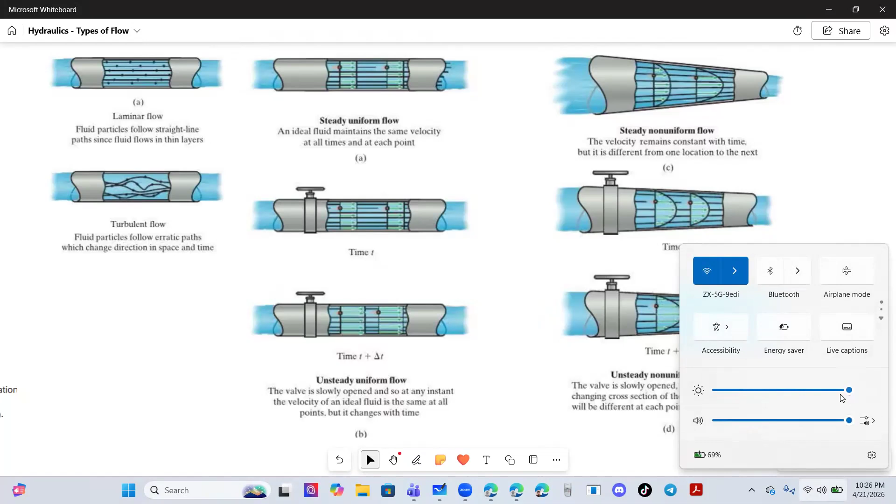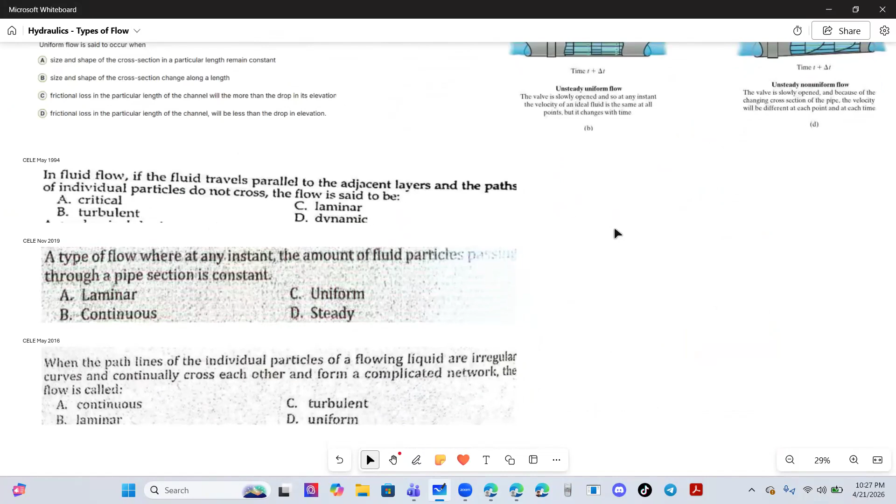Okay, so discuss natin tong fundamentals of fluid flow sa hydraulics, specifically yung types of flow. Ilang beses na yan lumabas sa boards, eto may compilation na ako, puro terminologies nga lang. Labasin yan eh, so practicein natin yan. Ito from IndiaBix, and may lumabas daw ng March 2026. Discuss natin, recent lang, parang ganyan yung tanungan.

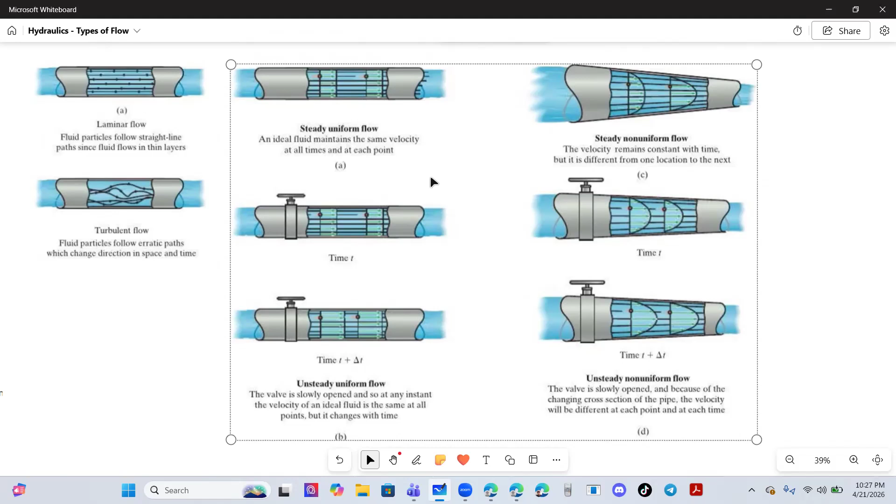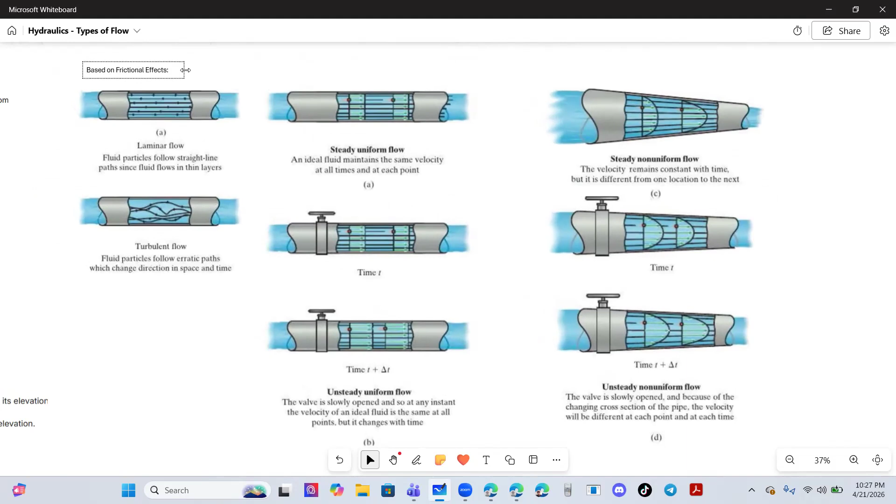Okay, so dito sa types of flow, meron kasi tayong maraming types or classification. Itong laminar and turbulent, yan yung based on frictional effects, kasi nga yan yung ginagamitan natin ng Reynolds number. Based on frictional effects yan siya, yang laminar and turbulent. Then meron din tayong tinatawag na based on space and time. Space as in yung position, position na lang kaya, space kasi sa book eh. Position and time. Ba mas malaki, so yan yung apat na yan.

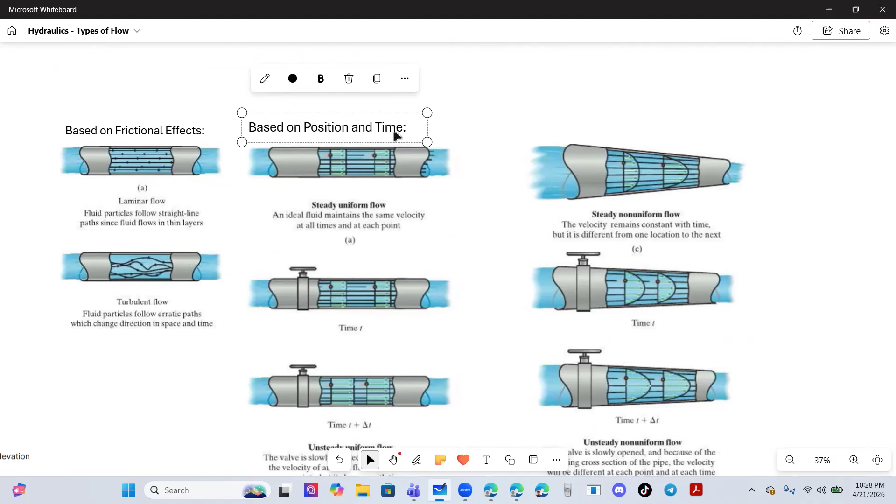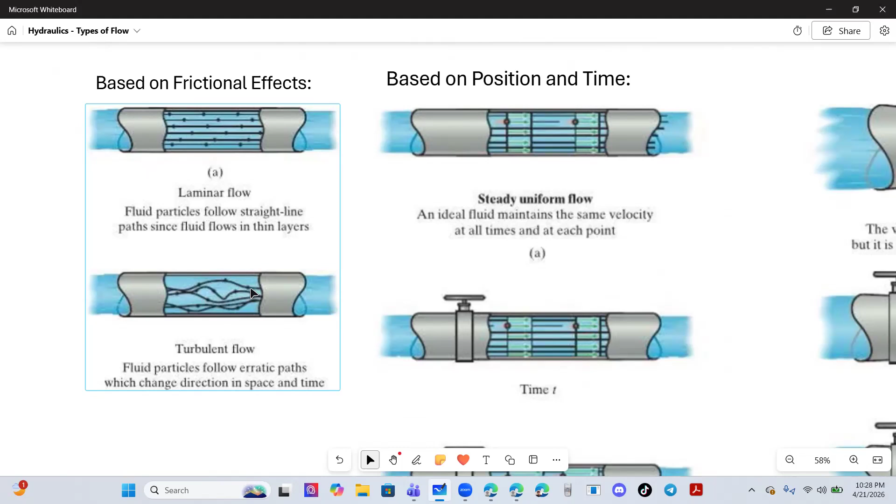So sa based on frictional effects, we have laminar and turbulent. Ang classification lang nito, kapag laminar, ayun yung paths niyan, yung fluid particles, yung path nun, is straight line and parallel, okay, so di yan magko-cross sa isa't isa. Unlike sa turbulent na yung erratic, nagko-cross cross with each other. So yun lang yan. Then meron pa yung values na Reynolds number, iwalay na lang natin na video yun. So dito in general muna tayo, so ganyan lang sa frictional effect, it's based on frictional effects.

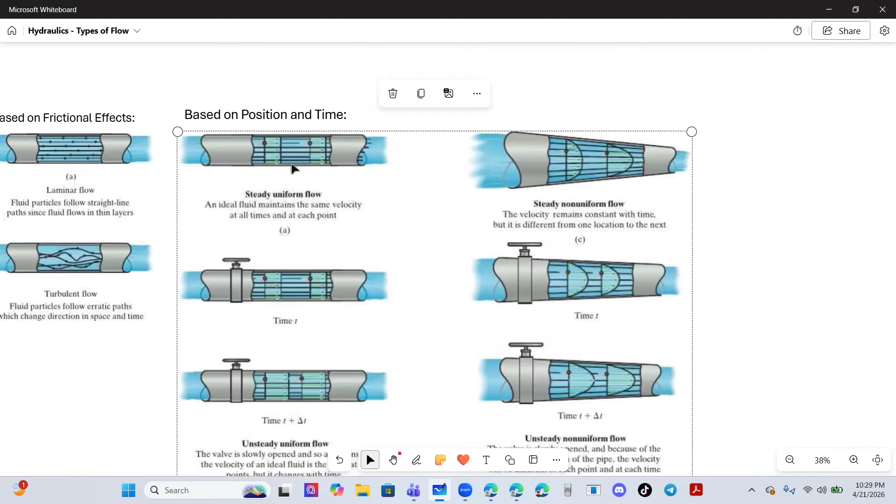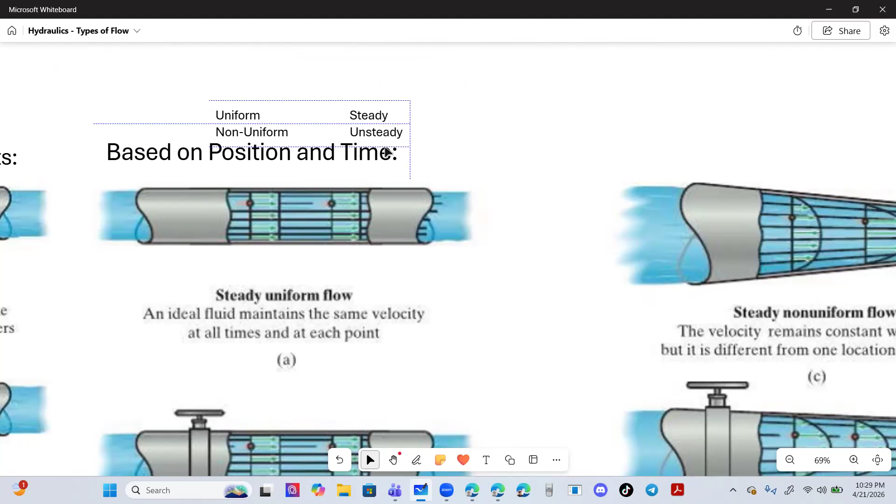So based on position and time, we have steady and unsteady, tapos uniform and non-uniform. Actually pag position, dito ko na lang, pag position yan yung uniform tsaka non-uniform. Okay, pag position, uniform or non-uniform yan. Pag position, either uniform or non-uniform yan, kasi yan yung nakabase sa cross-sectional area ng pipe. And kapag time, yan yung steady and unsteady. Yun lang, then pwede yan silang mag-cross, kaya apat yan, 2 times 2, 4. Pwedeng uniform unsteady, uniform steady, non-uniform steady, non-uniform. Oh baliktad pala ako, steady pala yung una: steady uniform, steady non-uniform, unsteady uniform, unsteady non-uniform. O ganun, so again kapag steady.

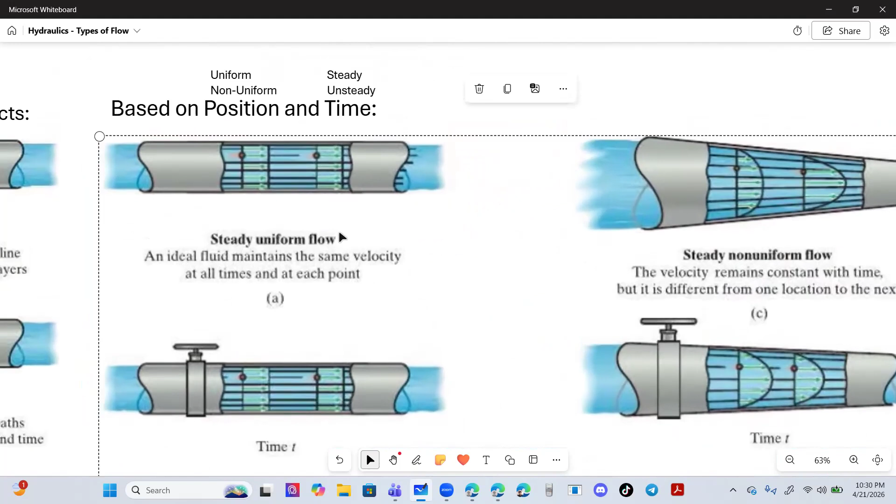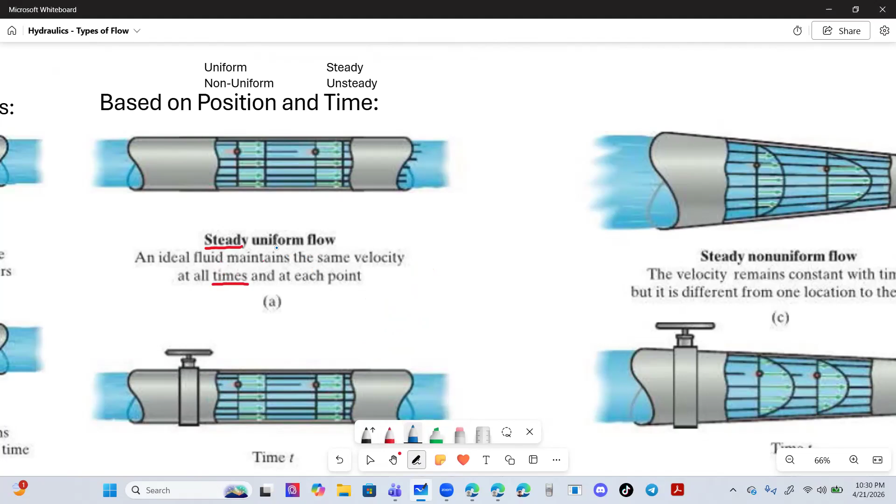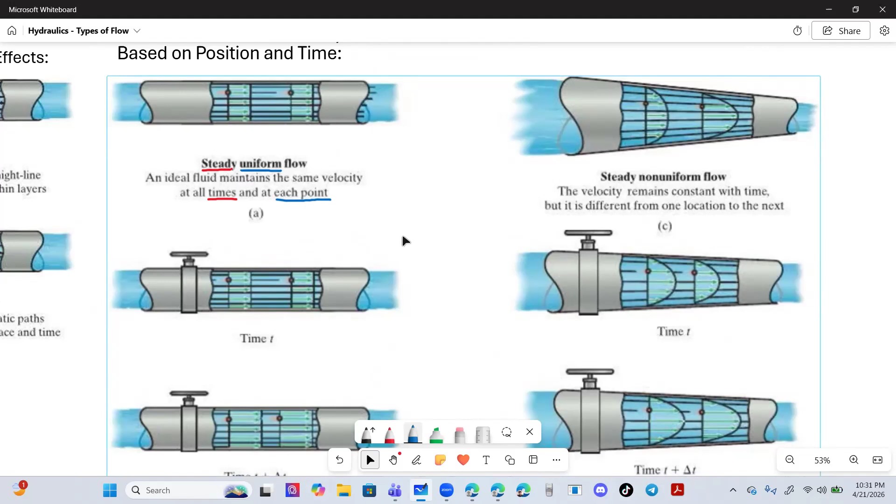Ito yung tinutukoy niyan. Kapag steady, an ideal fluid maintains same velocity at all times, so ayan, steady for time. And then ang uniform naman, anong shape? Ano nung kanina, tatlo. O kapag uniform naman, yan yung nagbabari sa each point, so cross-section. Kaya masasabi mo kapag similar, uniform yung cross-section, uniform flow yun. Ganun lang, diba, so ayan. Kaya ito, steady uniform, so hindi nagbabari with respect to time and hindi rin nagbabari with respect to distance, position. Kasi all throughout ng pipe is same cross-section lang, prismatic kumbaga. Di ba, ito pag steady ng uniform, ito yung sa steady, velocity remains constant with time.

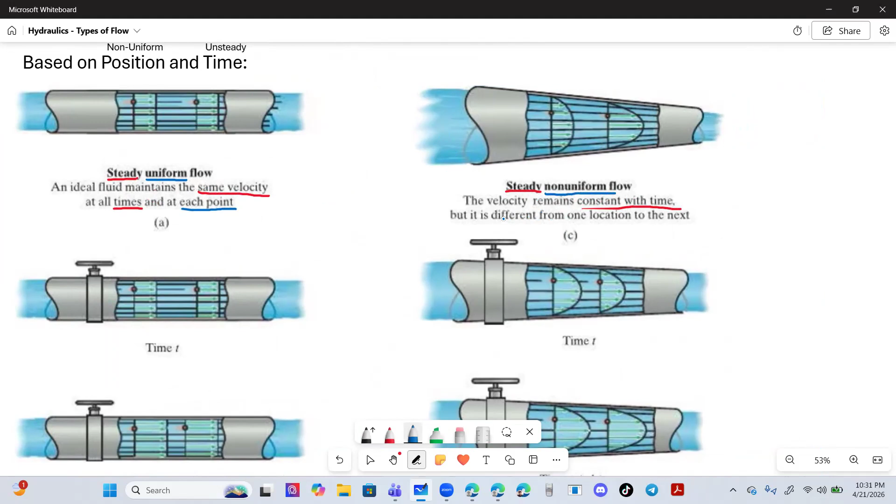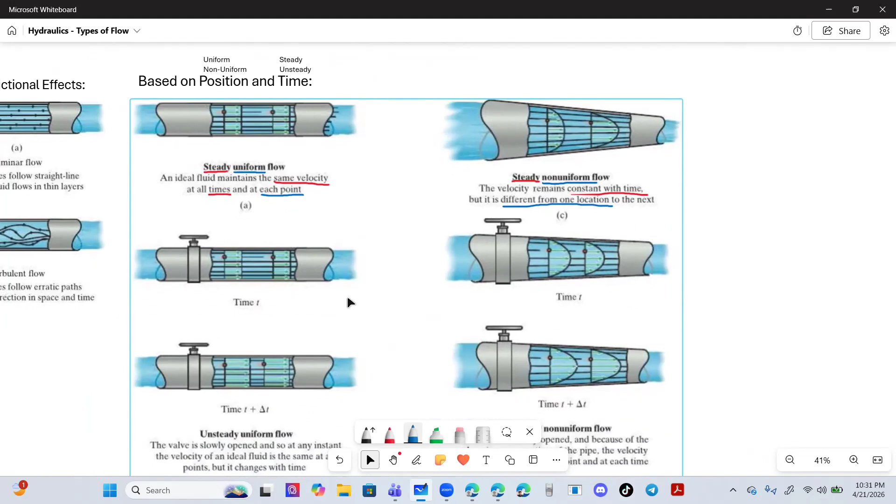Yan, constant with time, ito same velocity at all times kanina. And then kapag non-uniform naman, ayun, different from one location to the next. Kasi nga ayun no, tapering siya di ba, so dito mas malaki, dito mas maliit. Non-uniform yan, pero steady, kasi with respect to time, same velocity lang. And kahit anong oras, same lang yung velocity sa bawat cross-section. Ay, sa bawat oras rather, sa bawat cross-section, yun na yung magiging, nagba-vary na siya.

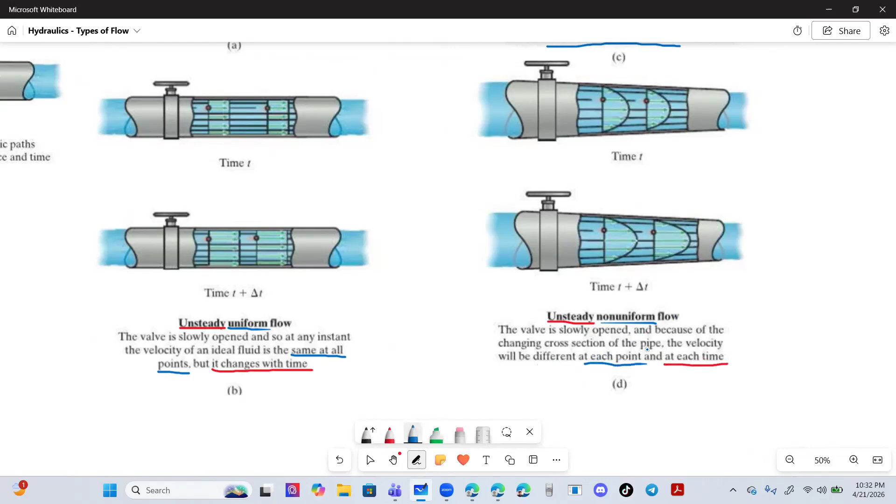Kaya non-uniform. Okay, so dito tayo sa unsteady uniform. So pag unsteady, again, it does change with respect to time. So the valve is slowly opened and so at any instant, it changes with time. Pero para sa uniform, at any instant, velocity is the same at all points, kahit ano ang location niyan kasi uniform nga siya, same cross-section lang all throughout. Pero dito sa isa, ano naman ma-undo? Dito sa isa, unsteady with respect to time, yan, different at each point, different at each time, and then non-uniform din siya kasi different din siya at each point. So ganun lang, and pag pinagsama-sama yan, ayun na: pwede steady uniform, steady non-uniform, unsteady uniform, unsteady non-uniform.

Pero dito sa isa, sagutan natin tong una, March 2026, discuss na natin. So if the velocity of the particle varies from point to point, vary from point to point, so that is, yung velocity nagbabago di ba, non-uniform yan. O yan na ba yung sagot natin?

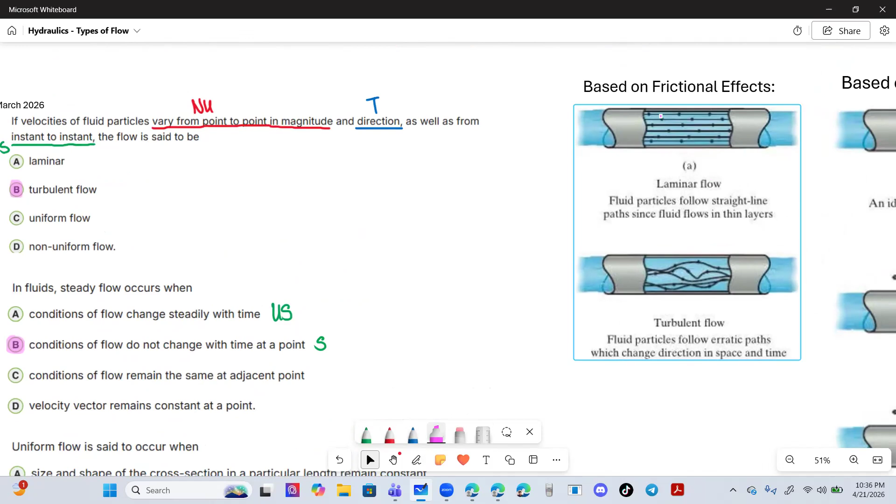What's this? Unsteady, okay that's correct. I see, you're getting the shortcuts now. Uniform is said to occur when - for uniform, that's about cross-section. Size and shape of the cross-section in a particular length remain constant.

So this one, size and shape of the cross-section change along the length - that's non-uniform. So this is uniform, then frictional loss in a particular length of channel will be equal to the drop of its elevation. So this has losses - use Bernoulli's.

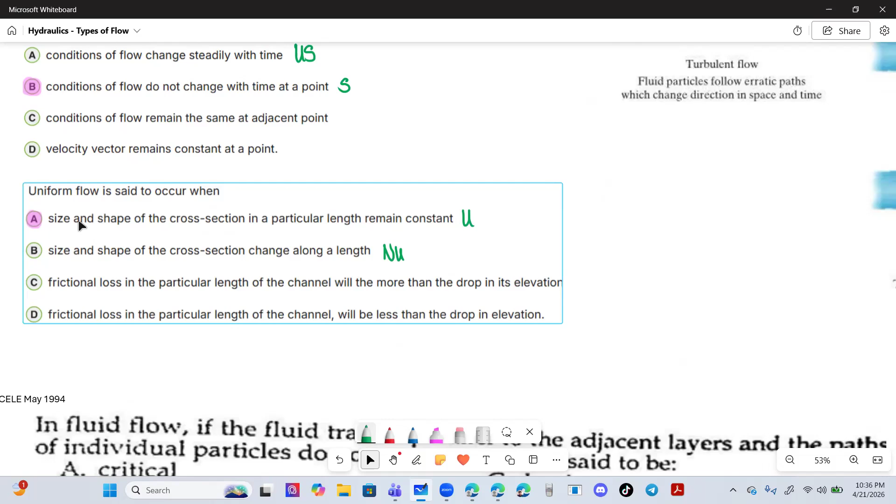So frictional loss in the particular length of the channel will be less than the drop in elevation. This one, just remember, for uniform flow, it's really just about cross-section - that's the indicator. Okay, uniform is about cross-section.

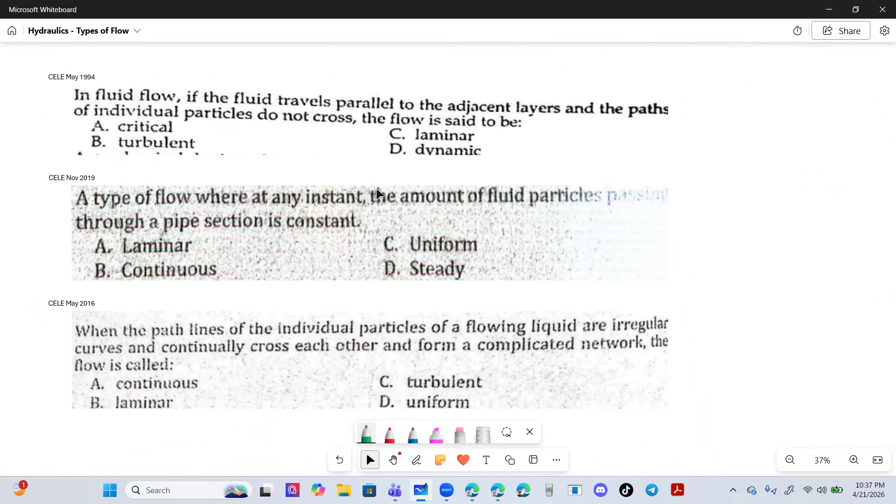That's why when it's constant all throughout your pipe, that's uniform flow. Now let's answer this past board question, CELE May 1994. In fluid flow, fluid particles travel parallel to the adjacent layers and the paths of individual particles do not cross.

That's the clue - do not cross. So therefore, the flow is said to be... and do not cross... so therefore the flow is said to be laminar. Okay. Next, from Nov 2019: a type of flow where at any instant, the amount of fluid particles passing through a pipe section is constant.

At any instant - that's time, right? Any instant of time, amount of fluid particles passing through the section pipe is constant. So, that is, at any instant - that's time. That's why it's steady flow, it does not change, right? Is constant, so that's steady flow.

And then lastly, from May 2016: when the path lines of the individual particles of a flowing liquid are irregular curves and continually cross - the keyword is continually cross each other and form a complicated network. So that's turbulent.

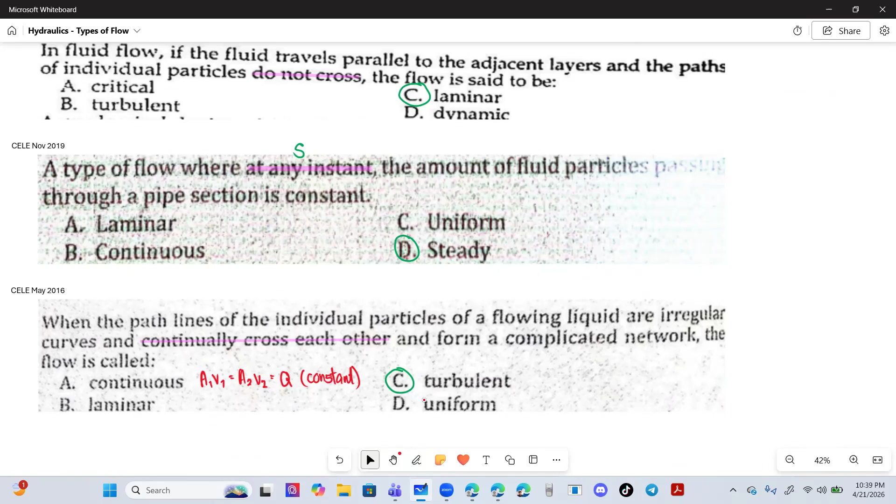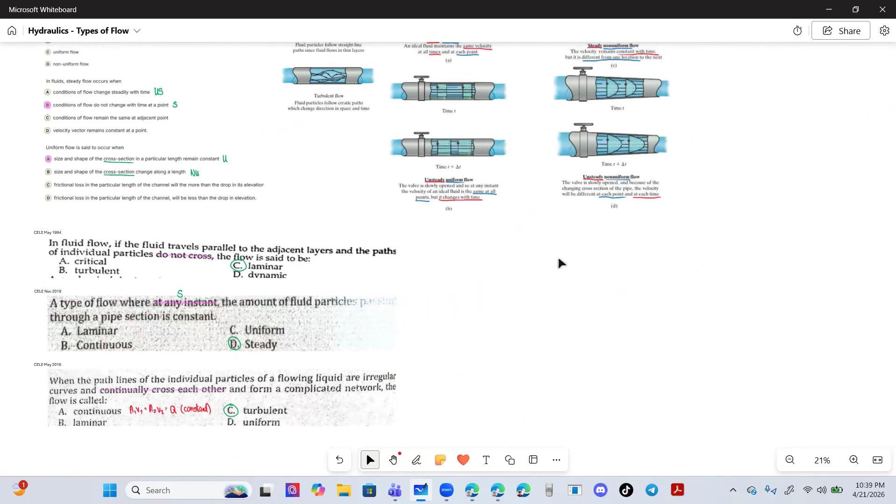That's it for these problems. Hope you learned something. Thank you.